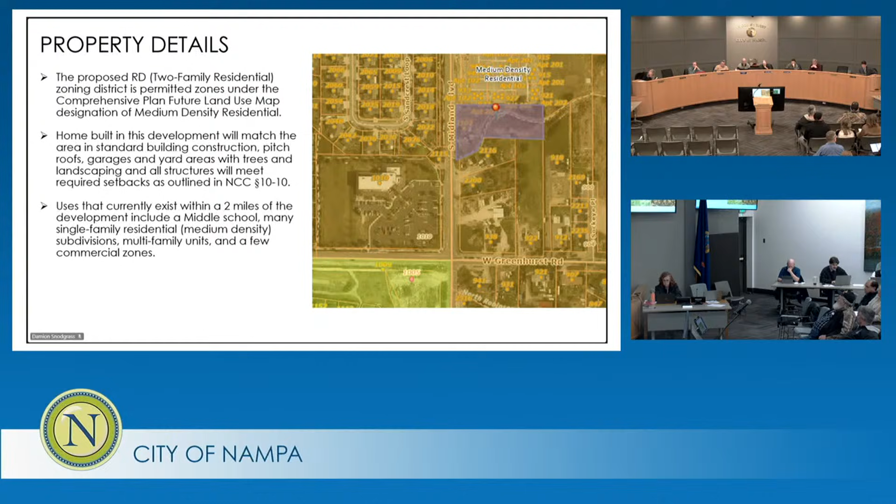Here are the applicable regulations for annexation and zoning, we'll cover those in the findings. And the applicable regulations for the RD chapter, where 2-unit townhouses and 3 to 4-unit townhouses are permitted.

This is some of what could be done on the property if it were to come through as a plat, so it's a preliminary look before a plat actually comes in. Under the MDR designation, you would need 2.51 to 8.01 dwelling units an acre in gross density. So we'll calculate the total area being developed and divide that by the number of units.

Looking at the property right now, there's currently 1.66 acres of land. When you subtract the right-of-way that will need to be dedicated, it leaves about 1.53 acres of buildable space. Calculating the density at 8.0 dwelling units an acre, the max amount of units that you could put on this parcel is 12.2 dwellings.

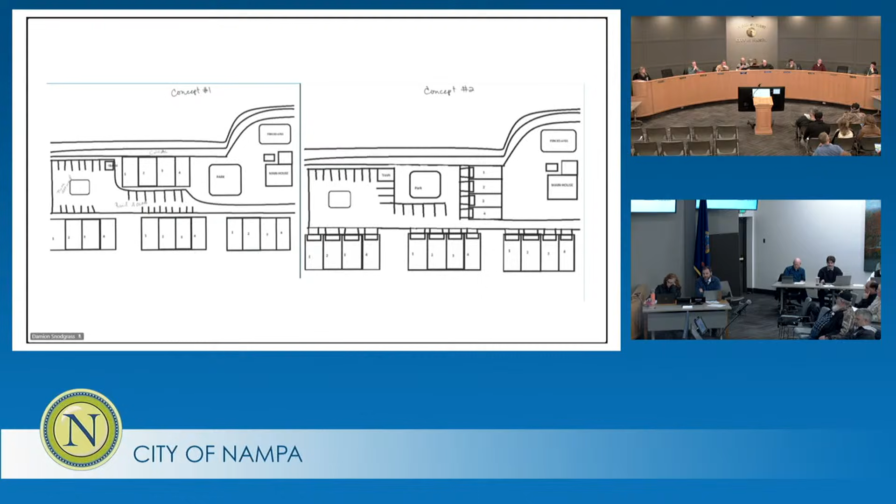Mr. Chair, maybe I can report back on a little research I did while you were talking. The application was originally for an RS zone. However, when it came into staff, they worked with the applicant and said the RS zone doesn't even allow townhouses up to 4 units, so it wasn't a possibility. In conversations with the applicant, they changed it to RD. I think it was just a little confusion over which zone it was, but RD is the one that was discussed, the one that was advertised, and the only possible one they could go with to do 4-unit townhouses.

Okay, thank you. Mr. Chair? Yes. You can tell me if I need to save this for deliberation, but I'd like to ask either Damien or Daniel, looking at this piece of property, that canal basically bisects it. And if that has to be an easement, how do they even use half of this lot?

It is not uncommon for canals to be rerouted with development out to the exteriors of the property lines. So they would bury it and run it along the edge? That is oftentimes what happens when ground is developed that has an irrigation canal or lateral on it. Thanks.

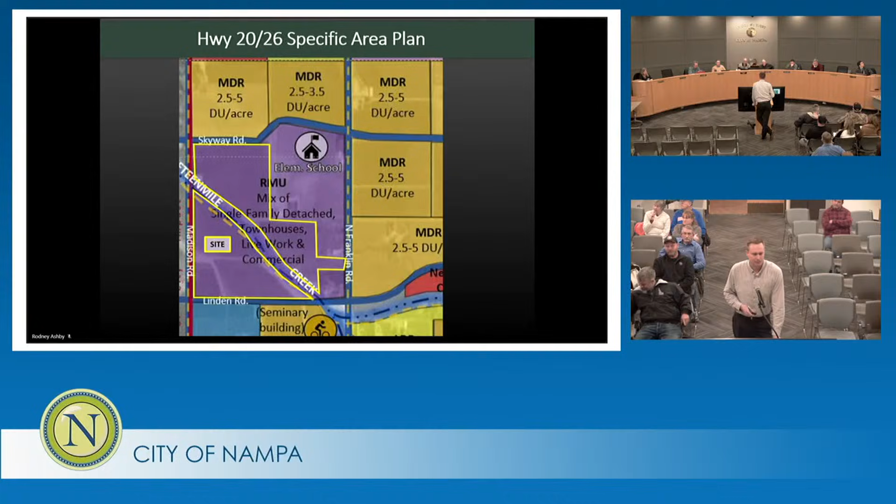We are proposing 3 different zones, a mix of single family housing districts as well as a commercial district. We have the RS6 up into the north, and that area is more of our larger lots. These average around 6,800 square foot lots, ranging from about 62 to 65 feet wide. We're looking at 3.55 dwelling units per acre in that brown area.

Now as you move to the south across 15 Mile Creek, on the south side of 15 Mile Creek, that's the RS4 zoning district we're proposing. This total acreage is about 66 acres, with a dwelling units per acre of about 4.48, so a little higher density as we move south. These lots average about 4,800 square feet, roughly 40 to 50 feet wide.

And in the southwest corner at the Madison and Linden intersection, we have a BC zoning district. This is a commercial area. It's just over 8 acres for the zoning, but the lot itself, after right-of-way dedication takes place, is about 6.5 acres.

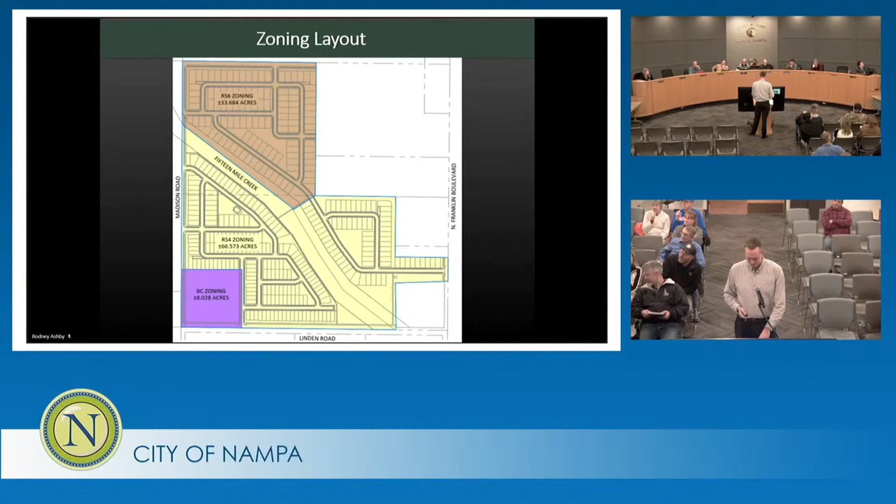Moving ahead, this is a rendering of the proposed layout. In total, 355 buildable lots. As I stated before, we have the RS4, RS6, and the BC. Within the RS4, there are 244 lots, and the RS6 has 111.

Now we have multiple access points proposed with this project. We have a few over on Madison, I believe 3 in total on Madison. And then we have 1 to the south on Linden, and then 1 to the east on Franklin. There will be some right-of-way dedication that has to take place, and as outlined in the TIS, there are some turn lanes that will need to be provided. The intersection of Franklin and Linden needs to be upgraded as well. Daniel, in his staff report and conditions, made sure those are included as conditions in the overall staff report for this development, and we are amenable to all those conditions of approval.

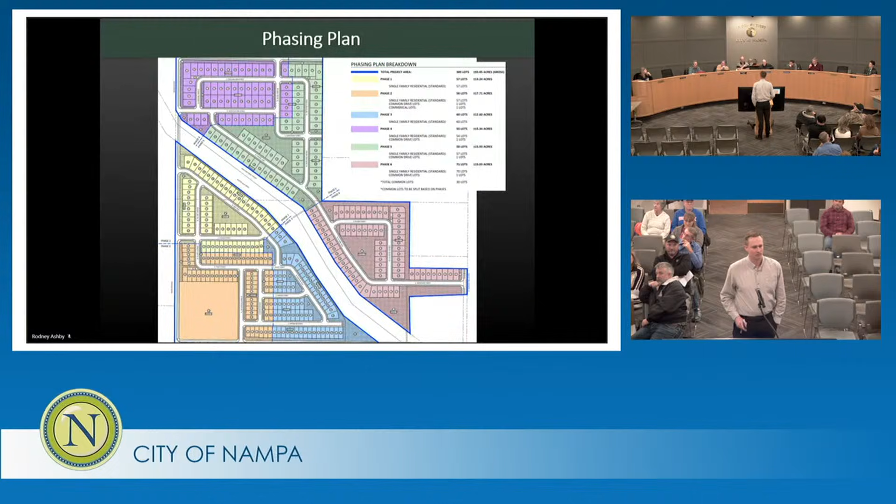I got one. I noticed on the ITD report that they said that with the proximity to Highway 20/26, there may be something needed to be done up there for traffic after they review the traffic impact study, but it doesn't sound like they've got it yet. Are you aware there might be something up there you have to do with ITD?

Yeah, Commissioner Turner, so I did speak with ITD on the phone. I can't remember her name, it's a new gal over there, but she said she didn't have any concerns with the project as a whole. They have some new turnover at ITD, and she was delayed in getting the TIS. She said they need further analysis of that report before they can give us clear guidelines as to what they might require. Given the distance from Highway 20/26, I would be surprised if there were any improvements required, but who knows. Just want to make sure you've seen it too, because if it started to have to do something on 20/26, it could get really expensive. Yeah, absolutely, absolutely.

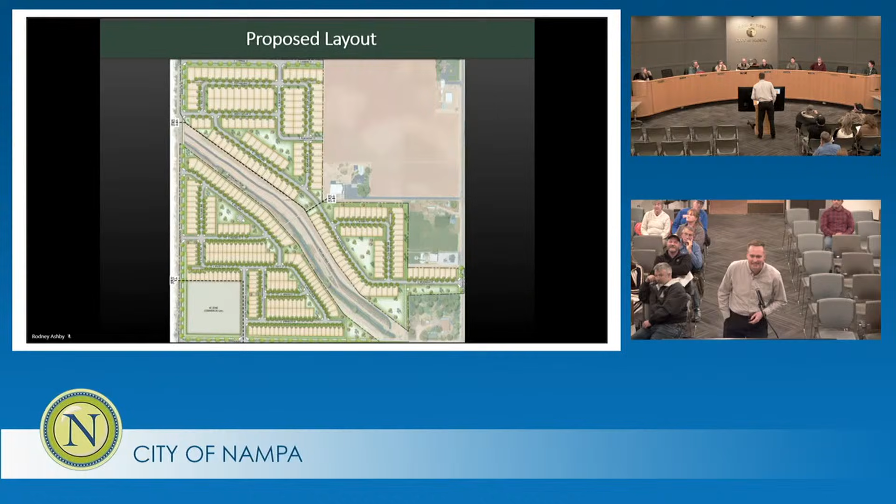Chairman, can we go back to the slide that had the pathways? I'm asking whoever's got the slide. Which slide - before this one or after this one? Yeah, that's fine, on that upper left-hand rendering. It says multi-use pathway.

How is that going to be constructed over the canal? I wish I knew the answer to that, sir. At this time, that is a goal of ours to have that pathway cross the canal. We don't know how it'll be constructed, but the property owner would like to work with Pioneer Irrigation District to make that happen. We would hope that maybe that could be something required in the development agreement, to have some sort of pedestrian pathway across there. But obviously, it's not our jurisdiction - the property owner's jurisdiction is Pioneer Irrigation District.

But the irrigation district doesn't prohibit you from building a pathway across there? Well, it is an easement, so they absolutely would have to sign off on that to achieve that kind of construction. Could you tile it and then just cover and level it to the ground? Yeah, and that is an option. I know with this application, there is a floodplain development permit that'll be required.

Even though it is a canal feeder, there's also the 15-mile creek, so this area is technically within a floodplain. We have to do a flood study to determine the area that can or cannot be developed, and potentially have to add some grading and fill to the site with the conditional letter of map revision. Through that process, there might be some alteration to the ditch itself, and at that time, perhaps there would be construction that could take place for the pathway. But once again, this is more preliminary, more conceptual in nature, and a goal of the property owner in the development.

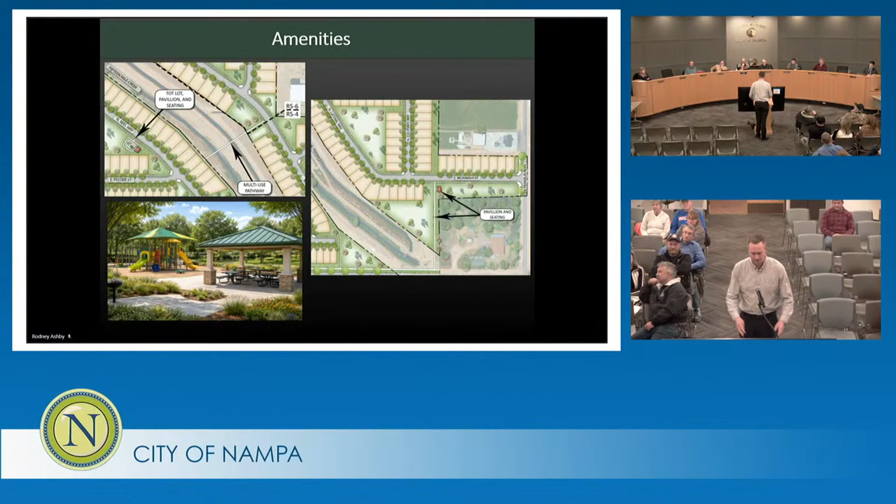Okay, Rodney. Thank you, Mr. Chair. Rodney Ashby, Planning and Zoning Director. The applicant has shown a lot of the same material that I was going to show, so I'll probably just skip over a lot of it. Please let me know if I need to slow down here.

The original concept is 355 single-family homes, 33 common lots, and 1 commercial lot. You've seen this already. I've asked Daniel to be here to talk about traffic, and then also I've got another slide about ingress and egress, so he's going to speak to that and I'll jump back on.

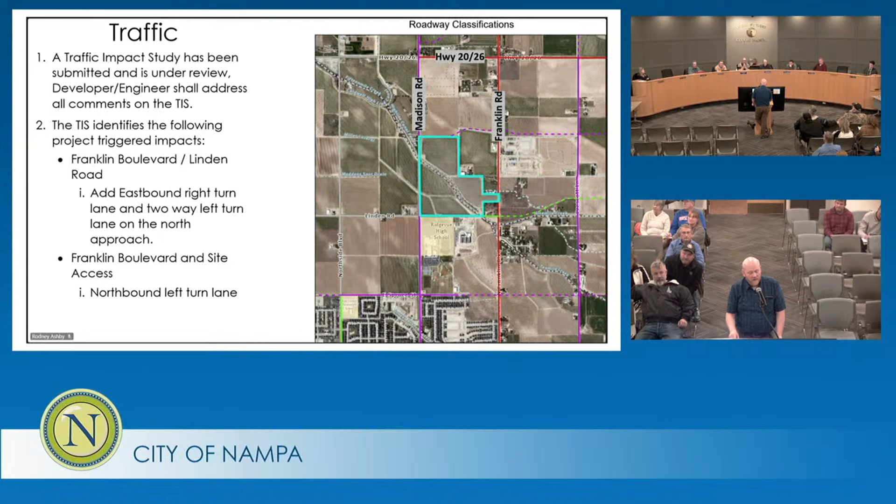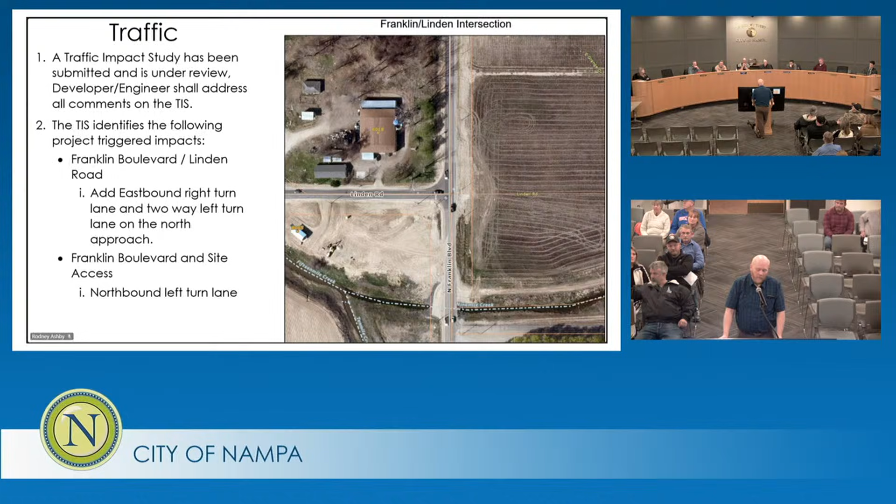Mr. Chair, Commissioners, the applicant was correct. We have reviewed the traffic impact study. There are a couple of mitigations triggered by the development: an eastbound right turn lane and a two-way left turn lane on the north approach of Linden and Franklin. That two-way left turn lane would extend up to their site access heading north on Franklin. Those are the project-triggered improvements.

The traffic study does identify other improvements in the area that are background traffic issues, not generated or triggered by this development, but are there based on previous developments and general growth within the area.

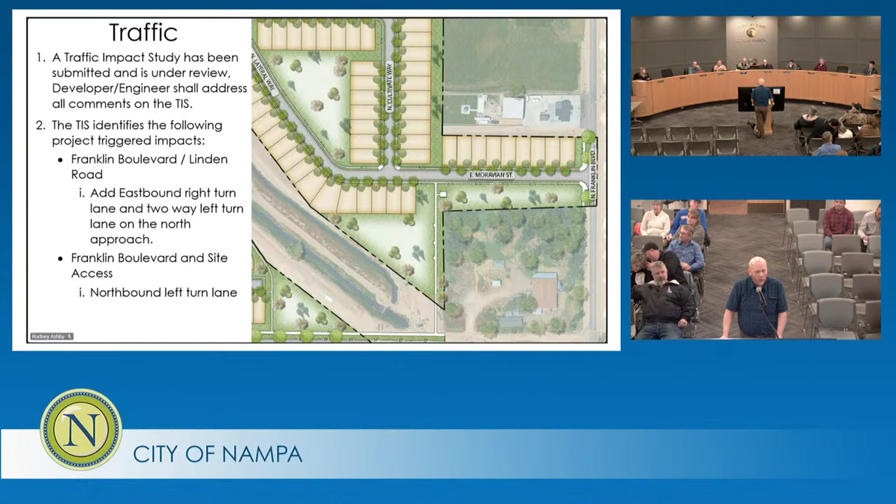In addition, talking about the access and layout, they will be required to dedicate right-of-way for all three of their frontages—Linden, Madison, and Franklin. For the collector roadway, Madison, they will have to do full widening: curb, gutter, sidewalk, pavement widening. On Linden and Franklin, they will have to do sidewalk improvements or a side path, that 10-foot side path along there, borrow ditch improvements, and any turn lane improvements we talked about, but would not be required to do full widening, based on city code.

The other comment I had on access and layout: their collector road placed at the north of their project has a house in line with that, and so, as with previous applications, we've worked to shift that to the north at their east boundary. They will need to make that modification to the plat, but it's not significant and doesn't impact any of the lots they would be proposing.

For the floodplain analysis, that is something they are required to do by code. The other flood studies we've had come in on the 10-mile and 15-mile have been able to adequately identify the improvements that are needed.

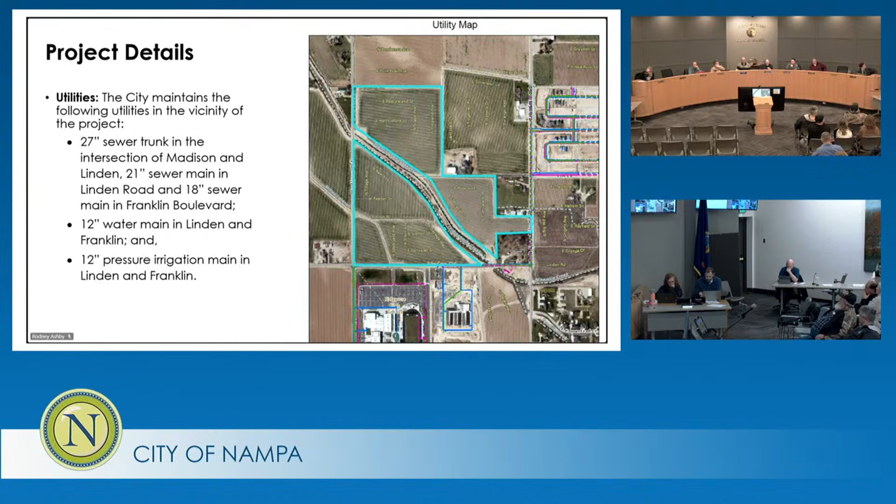You've seen this, but just the staff analysis: total acres for the subdivision is 93.75 acres. Sometimes there's confusion from the public seeing these advertised for a certain acreage. For the subdivision, it takes out the dedicated right-of-way, so the number may differ slightly from what some have seen. But 93.75 acres for the subdivision, one commercial lot at 6.5 acres, 29 common lots plus 4 common driveways equals 17.20 acres, 355 residential lots at 44.74 acres, internal public roads at 0.21 acres, and qualified open space totaling 15.13 acres, which is 16% of the site, with a total residential gross density of 4.14 units per acre.

The zoning in this location for RS is a permitted use for single-family dwellings.

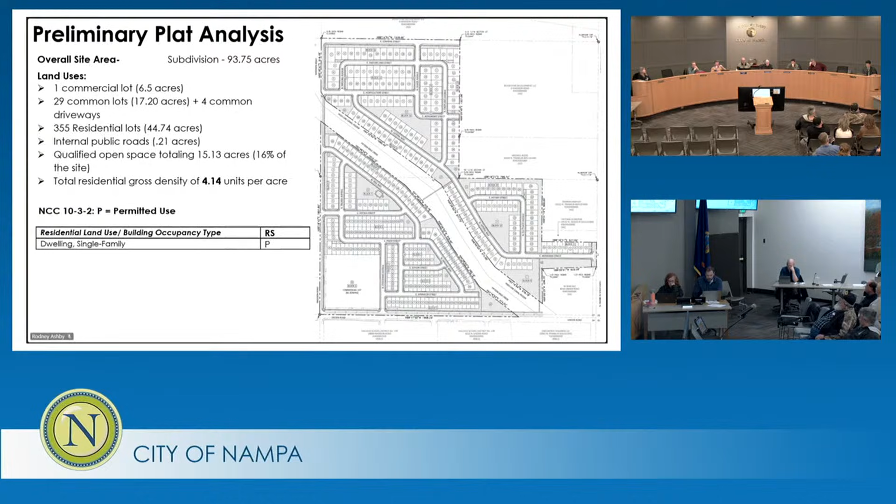This is the plat that's in your packet, I'm sure you've seen that. Here are the lot sizes and minimum widths required. Generally they are in compliance with this. However, I want to note that I saw two lots exceeding the 8,000 square foot maximum for the RS4 zone, so they'll need to correct that to comply with code. Both of those situations were next to open space, so it probably just means a small adjustment on a property line to add a little additional open space, and they would be fine that way.

Lot sizes within the RS6 zone: the proposed lot sizes range from 6,358 to 9,799 square feet, which is within the range for RS6. The density, as I've said, is 4.14 dwelling units per acre, right in the middle of that medium density residential range. Lot width and depth: all lots proposed meet the width and depth required by city code.

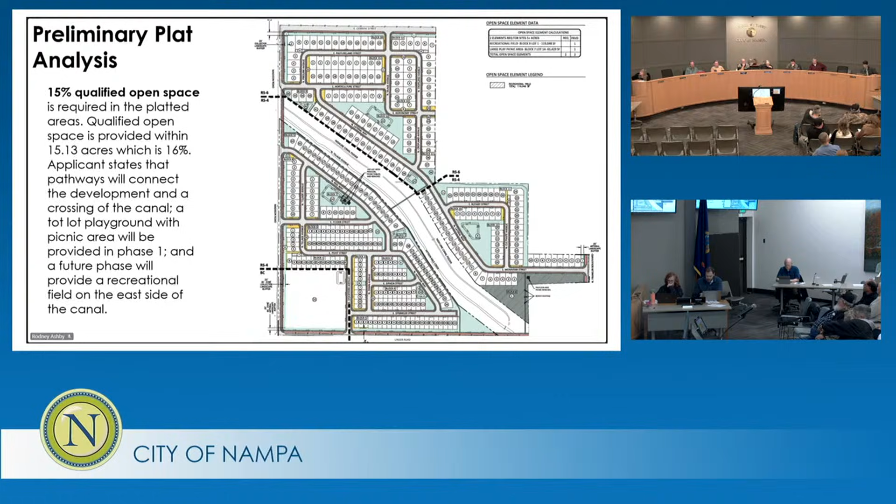This is the landscape plan, and they've highlighted the areas proposed for the qualified open space requirement, again at 16% with the additional amenities highlighted. A 25-foot landscape buffer is required along Linden and Madison Road for residential portions of this development, and a 20-foot landscape buffer is required for the commercial portions.

Parking will be assessed at the time of the final plat, but they'll need to comply with code, which is two spaces per dwelling unit on a single property.

Engineering comments on the plat: combine the street, we've heard that. The property is located within a defined floodplain, we've heard that too, and they'll have to go through that floodplain analysis, the flood study. Nampa's forester made several comments about tree species that will need to be revised and resubmitted, and to provide a minimum list of 5 tree species to be selected for the lot trees. That's because we get a lot of trees that have diseases or don't do well in our area, so it's an encouragement to use the appropriate type of trees.

Nampa Police Department gave their analysis. They indicated that when this is fully built out, they will need 1.18 additional officers and 0.62 additional support staff. Just a note here, I think this sometimes is confusing because it almost sounds like if the development is approved, we don't have a funding source to cover this expense. But we need to keep in mind that subdivisions pay impact fees, which can't go to police officers but can go to equipment and facilities. Second, we have taxes that accrue for the development as it occurs. So it's inappropriate to say that new development doesn't pay for itself. I know there's some confusion about that, but taxes currently cover police services—property taxes right now go 100% to the police services we provide in the city. So as buildings come in, they get on the tax roll and we start collecting taxes to provide these kinds of services to these departments, and it's a city council decision as to how to budget those needs. That's what they're doing here: providing context for when they request additional officers at budget time, saying we've been telling you all along that as growth happens, we need additional officers, and that's a city council decision. I hope that's clear—it's sometimes really confusing.